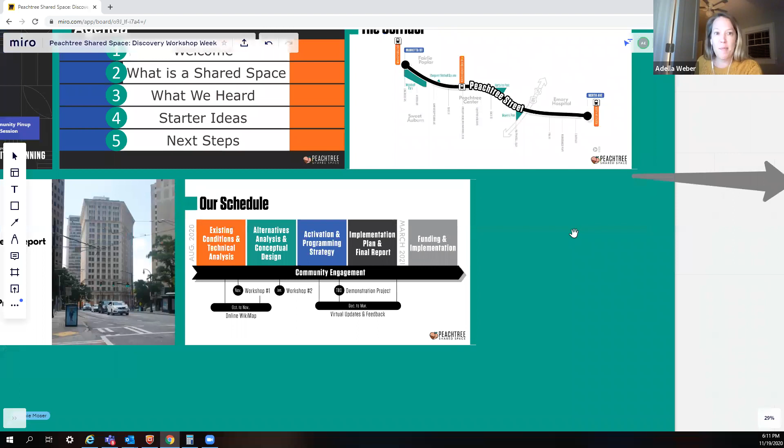In terms of our schedule, we're still at the beginning — at existing conditions and technical analysis. That means looking at where folks are going, how vehicles are moving through the space, where the hot spots are for pedestrians, and what's happening economically and in the market along the corridor. We're going to take everything we heard during this workshop, go back behind the scenes, flesh it out more, and come back to you in January with a refined concept for where this shared space should be. We're still at the beginning of the process, and we hope you stay with us throughout, looking at a beginning-of-spring endpoint for this study.

With that, I'll turn it over to Ian Lockwood to talk a little about shared spaces. For those new to us, hopefully this will be new, and for those joining us again, just a rehash of what we're here for. Ian?

Thanks, Addie. Yes, shared space — by the implication of 'share,' it means it's for everybody. It's a democratic space where everybody is welcome and feels comfortable. It doesn't matter if you have a disability, or if you're an elderly person, a woman, or a man — you will feel comfortable in the space. We're focusing mostly on the needs of residents and business people who work downtown and locals, and we're going to try to make this space as cool as we can, which would attract visitors as well. But it's really focused on all the different types of folks in Atlanta who want to use this space.

If you shift over to the right a little bit, this is a space — it's an older location, but you can see all the people walking and socializing, just regular folks enjoying the space, doing their business. This happens to be on our corridor just over 100 years ago, and you can see the same views in the background.

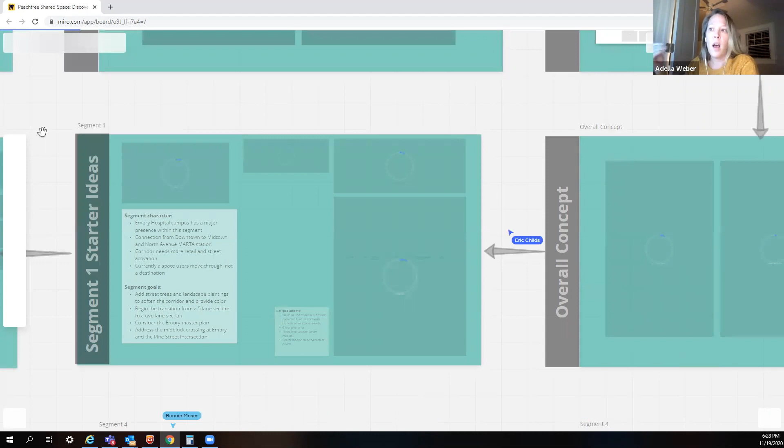We've talked with several folks at Emory Hospital, looking at their master plan, what's the bigger plan for the area, looking at how people are moving through the space and what historic qualities they have of the buildings throughout there. And with that, I'm going to turn it over to my colleague, Eric Childs, who is going to walk us through segment 1.

Thanks, Addie. Let me get the map up and running. I apologize. Thanks, Addie, and thanks everybody.

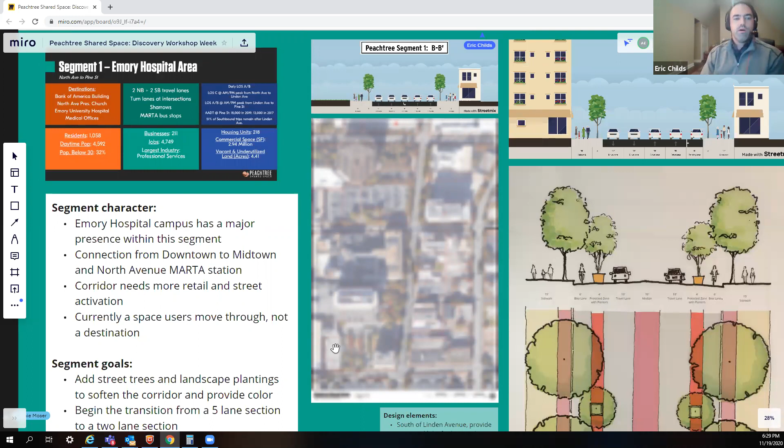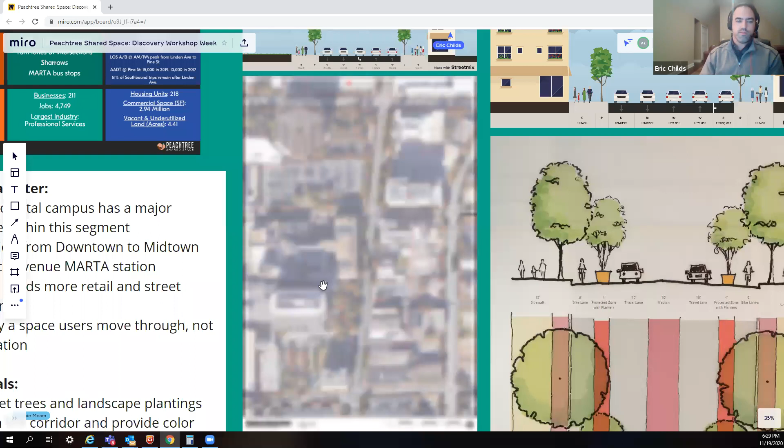So just to describe the character of this segment, which again goes from North to Pine, it's typically 4 or 5 lanes, mostly 5. It narrows to 4 in one small segment above Renaissance Parkway. As Addie mentioned, Linden and Pine provide access to the connector. And the Emory Hospital campus has a major presence here; they own most of the land, particularly on the west side of Peachtree.

Currently, the vast majority of their staff and visitors enter on Peachtree Street. While their master plan does call for that to change, it could be some time before that gets realized. And of course, we have the North Avenue MARTA station at the very north part of our corridor.

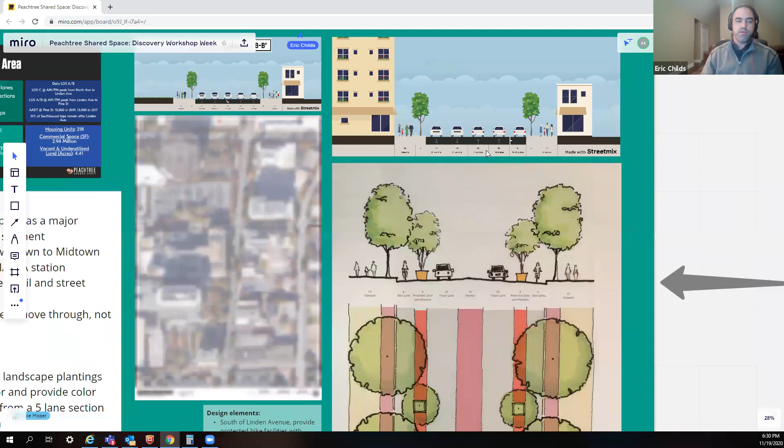So what we heard when we had a virtual open studio was that this area could use some softening through street trees and colorful landscape planting, as Megan was discussing. There was some concern about the number of vacancies, that this feels like more of a place to move through, and there's a desire for more street-facing activity. We certainly heard enthusiasm for bicycle facilities here, as well as a more comfortable and interesting pedestrian experience, and people noted the uptick in biking, particularly during the pandemic.

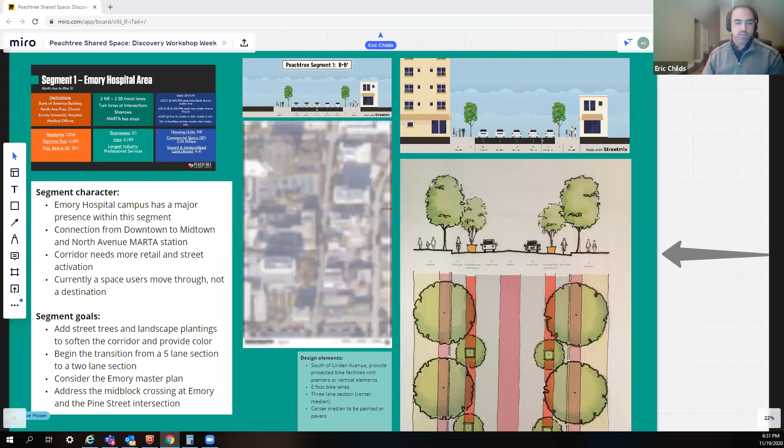So in terms of the goals we're trying to accomplish with this segment, thinking holistically about the entire Peachtree Street corridor, this segment is trying to tee up the transition we want to make from 4 or 5 lanes down to eventually 2 lanes. We certainly want to make sure our work meshes with the Emory Hospital campus master plan, which we've reviewed with them.

And there are 2 focus areas we identified that we'll need to continue looking at: the mid-block crossing at Emory Hospital, and the Pine Street intersection, which would mark the transition between segment 1 and segment 2.

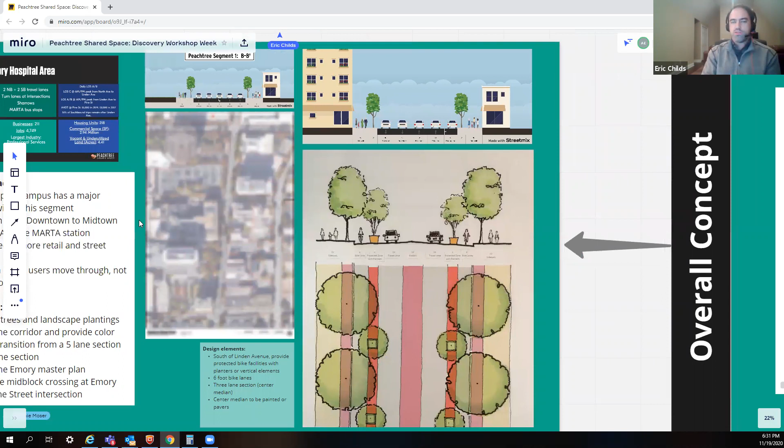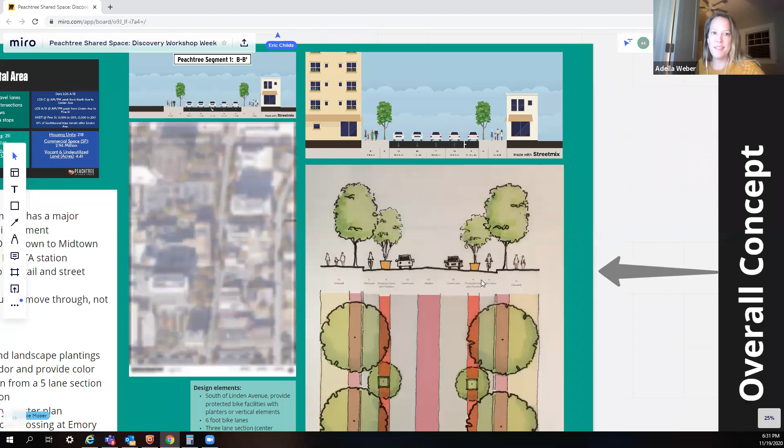So Addie, if you could zoom in on that section and plan vignette there, I can talk through some of the design elements we came up with. Sure, and I apologize because the aerial isn't popping up, but can I pause right here? Will that work for you? Yeah, that's perfect.

The idea here is that south of Linden Avenue, we would want to provide a 3-lane section that's 1 lane northbound and southbound with a center median, along with protected bike lanes that are also northbound and southbound.

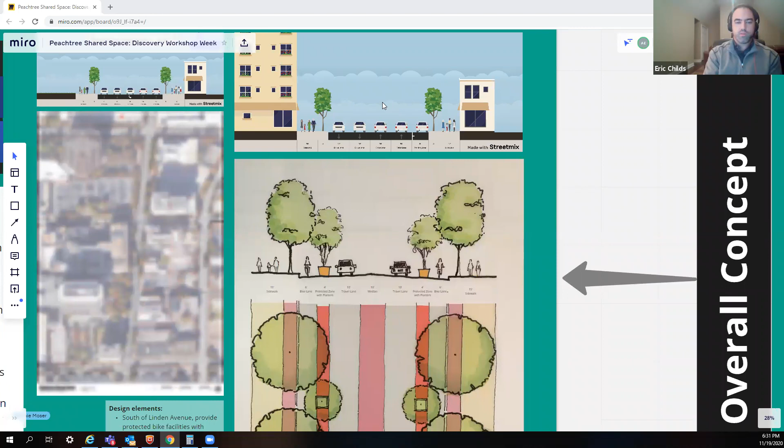Planters or vertical elements would protect cyclists from vehicular traffic, with 6-foot wide bike lanes and protected zones being 4 feet wide. We would want to paint those protected zones to help visually narrow the roadway, and the center median could be painted or use a paver that contrasts with the roadway surface.

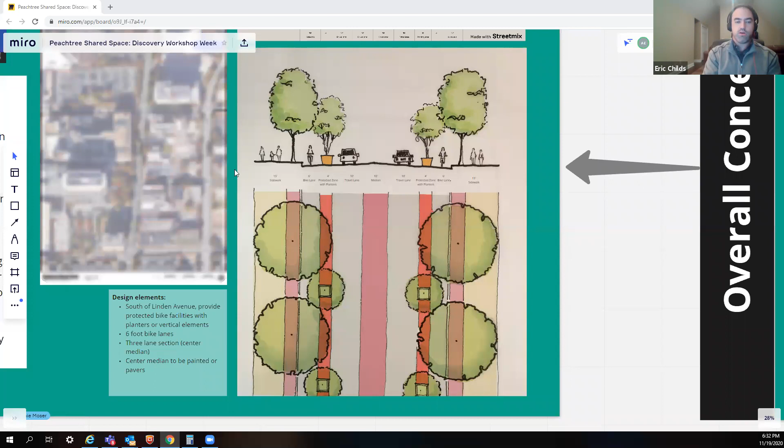The intent here is to rebalance the street for all users. We're trying to respect the need to provide access to the hospital, since the patient entrance is right off of Peachtree, and currently most employees and visitors access it off of Peachtree. We're also trying to respect the fact that Linden Avenue is a major connector, a major thoroughfare to the downtown connector.

When we were looking at the traffic data, something like 49% of the traffic going southbound on Peachtree turns off onto Linden on the way to the connector. So that's why we're trying to start the 3-lane section south of that point, and that helps tee up segment 2, which is what Bonnie will talk about next.

Hi everyone, and welcome to segment 2, from Pine Street to Porter Place. The 4 lanes, 2 in each direction, continue in this segment. And a little bit about the character of this area.

This is considered by most as a connection from midtown to downtown. Currently, folks are seeing it as a space that users move through, but not necessarily a destination. We heard that folks feel safe in this space, but they don't necessarily enjoy moving through it. It doesn't feel quite comfortable.

So we set some goals for the area. First, to instill some vibrancy. Second, to draw interest, so do something with this bridge that entices folks to want to cross it.

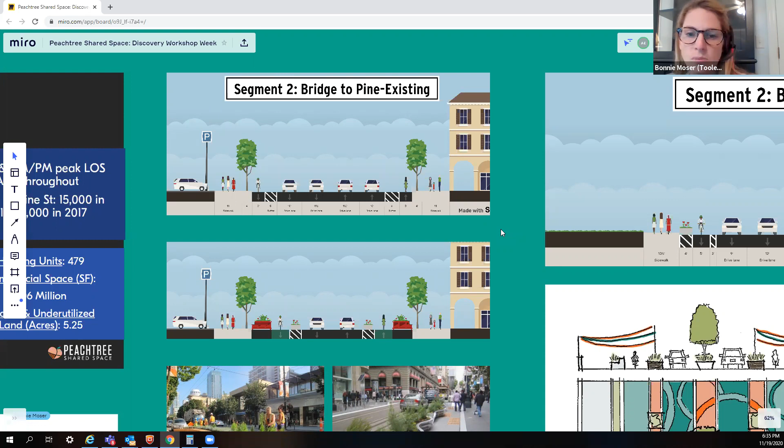So the idea here would be to put in some sort of planter or vertical element that's protecting cyclists, and widening those bike lanes since we have the room, making them 8 feet, so we're able to allow more cyclists and scooters to move through the space. With the additional room, we'd also love to extend the sidewalks.

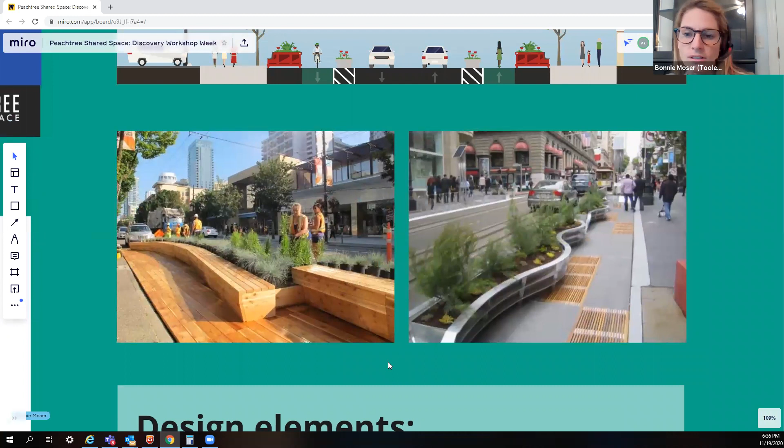Here you can see some images of retrofit sidewalks, so that at sidewalk level you get a little bit more space to move. If there's joggers or walkers, they've got a little bit more space to move through this segment of the corridor.

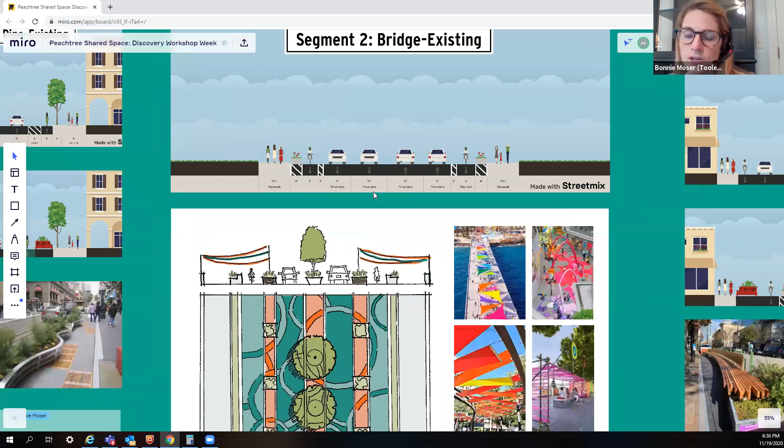Now let's move over to the bridge. Currently there is a jersey barrier with a planter that separates the sidewalk from the roadway, but the cyclists don't have any sort of protection other than a painted buffer.

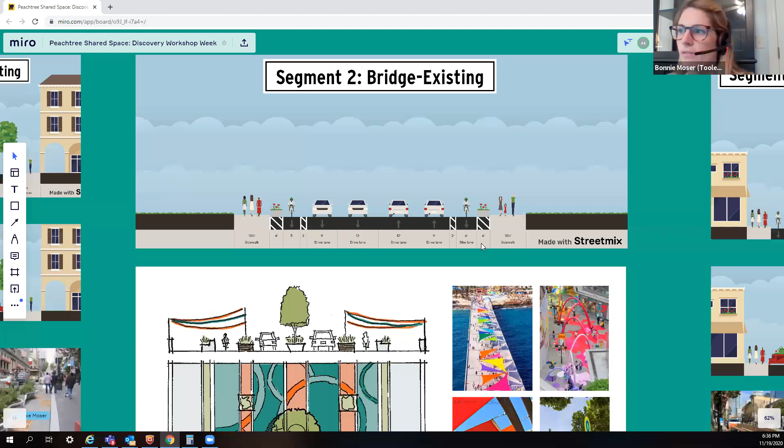Below you can see a plan view and a cross section. The green would be spaces that you move through, so those would be travel lanes and the bike lanes, which would be widened out to 8 feet. And then the orange are buffered areas.

So you've got maybe planters or some sort of vertical art element that's drawing folks' eye from the roadway out to the bridge and makes them feel invited into this space. And then a center median with ideally some sort of planter with a tree to narrow that roadway and make sure that traffic is calmed through the area.

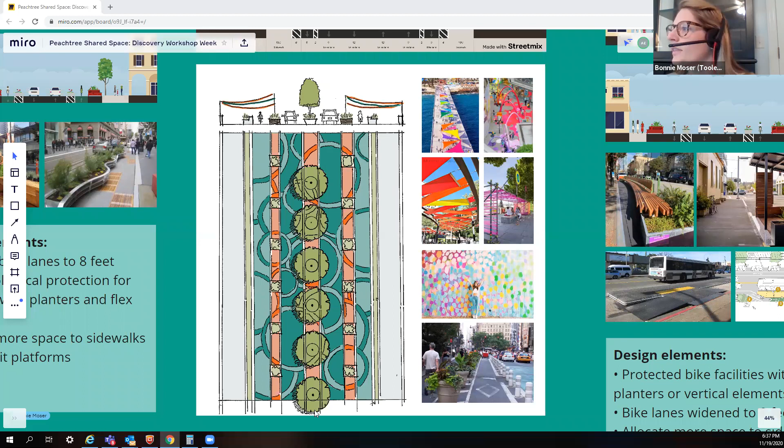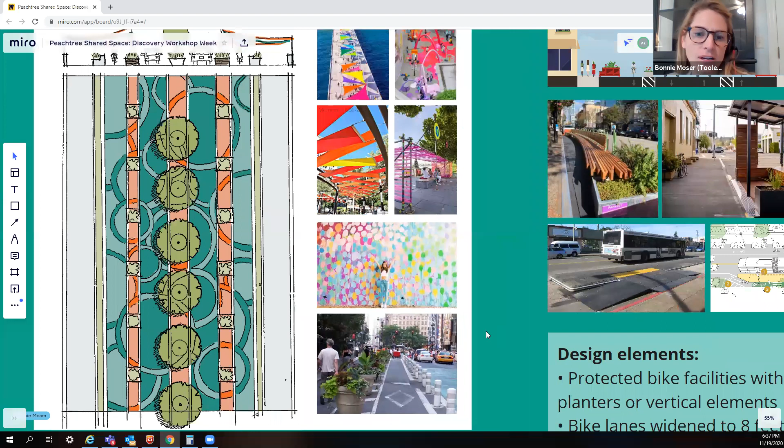If you'll look at the photos to the right, you can see a couple different temporary and permanent art installations. I was really inspired by the Hense mural on the Beltline. This is just an underpass, but I think most Atlantans know this is an iconic space for selfies and engagement photos. We would love for this bridge to invoke some sort of fun and exciting selfie element that draws people to the space and gets more people on the bridge.

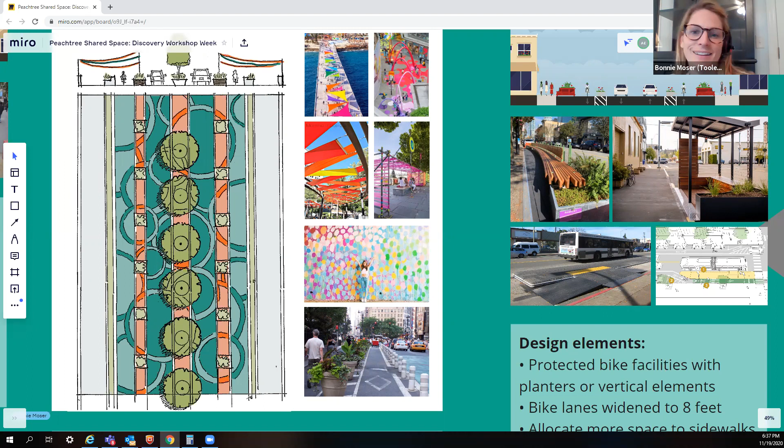Yeah, I think Bonnie's just spot on. We talked a lot internally on this team about where do people go to take that Instagrammable photo, or as CAP made a point of, what is the B-roll when people come here and start filming for the big sports arenas, and why isn't that focus on Peachtree Street? I think that's a really good point. How do these elements really start having breadcrumbs, as the James Lima folks talked about, that lead you down to a really special place and create that magic you want in your main street.

So just south of the bridge to Ralph McGill, you've got 4 lanes of traffic and then a left turn lane. Reallocating that space to 2 travel lanes, you're able to put in a buffer with planters for cyclists to have protection. Also in this area, you have some spaces where the sidewalk is a bit narrow, and you have some street furniture and lighting in the sidewalk that prohibits free movement for pedestrians. So extending the sidewalk through here, but also maybe some retrofit bus or transit shelters for folks.

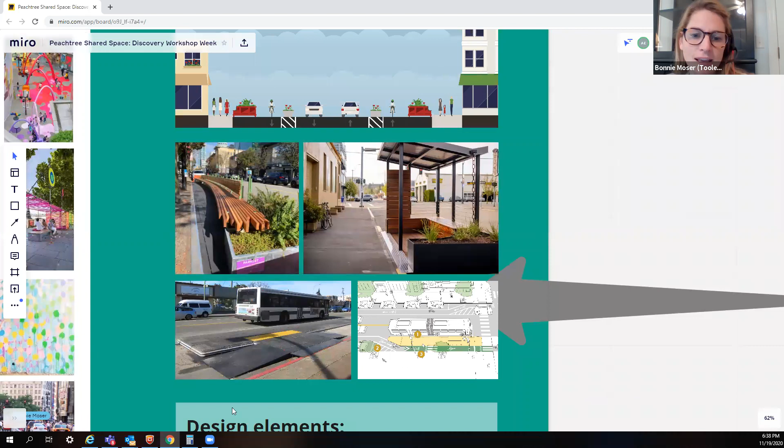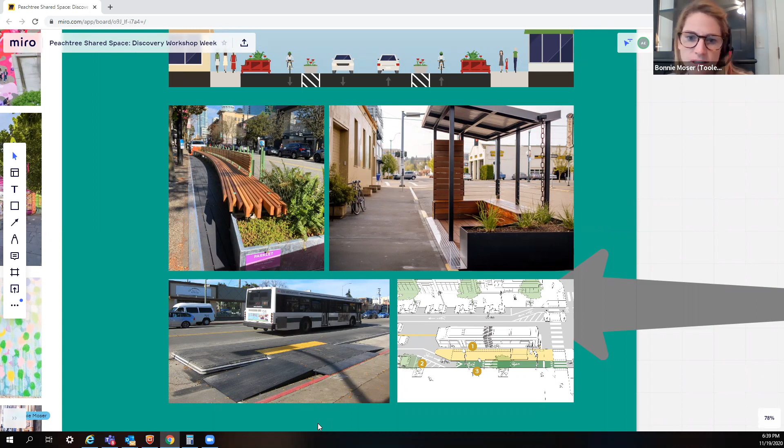And then you can see some images down here. This would be an idea where we could have a floating bus stop, so moving that bike lane in towards the sidewalk and then allowing a space for folks to load at the transit stops down on this end of segment 2.

All right, Bonnie, do you want to jump into segment 3? So this segment 3 is the Peachtree Center from Porter Place to Forsyth Street. This is the piece that the city of Atlanta in their previous work really focused on design-wise. So we wanted to take it back out, take a look at it, get feedback from everybody we've spoken to this week, and really identify, is this the right direction for this space? What's needed, what's missing?

Alrighty. So talking to folks this week and what we saw, we really heard that this segment of our study area is considered the heart of downtown. It's got an established density and it's a great place for folks to work. But we did hear that it's lacking in elements for everyday use - play, art, green spaces, the things you'd normally see on a main street, you don't see here. Folks view this as a space that they move through and not a destination. If they want to be outside, maybe they go to Centennial Park or Woodruff Park, but they don't typically tend to stay here.

You've got some difficult crossings at both Baker and Forsyth, and we'd like to use those as opportunities, maybe as gateways into this space. Lastly, transit's not always easily accessible for folks. Maybe they have an urge to cross mid-block to get to a transit stop or to MARTA, but there's planting or some sort of furniture that's prohibiting them from doing that. And the scale of the architecture in the roadway through this space is not reflective of what you would see in a main street.

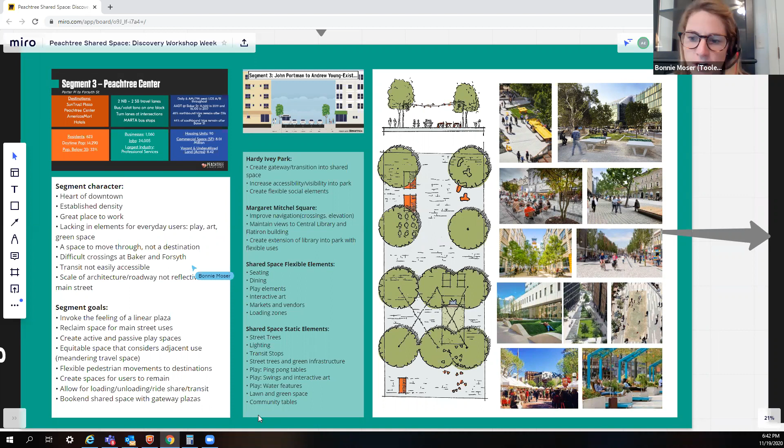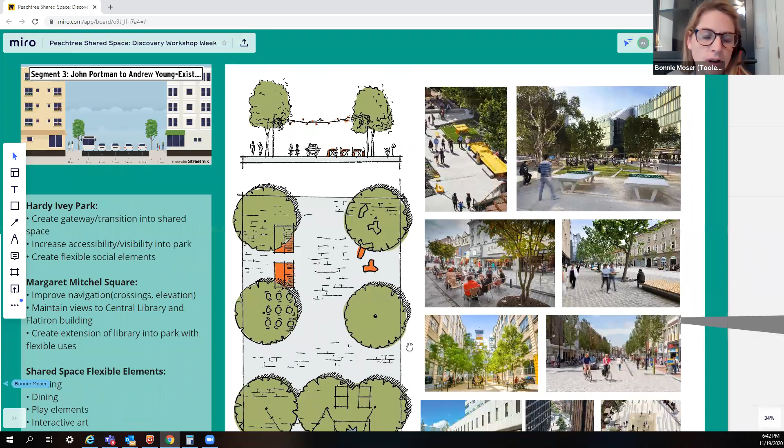Lastly, we know that there is some loading and unloading happening in this area. There are some transit stops as well as ride shares happening, so we want to make sure that we maintain that in the area. So moving on, I'll just touch briefly on Hardy Ivey Park. We don't have concepts to share for you all yet, but we do see this as a gateway and a transition into what could be the shared space.

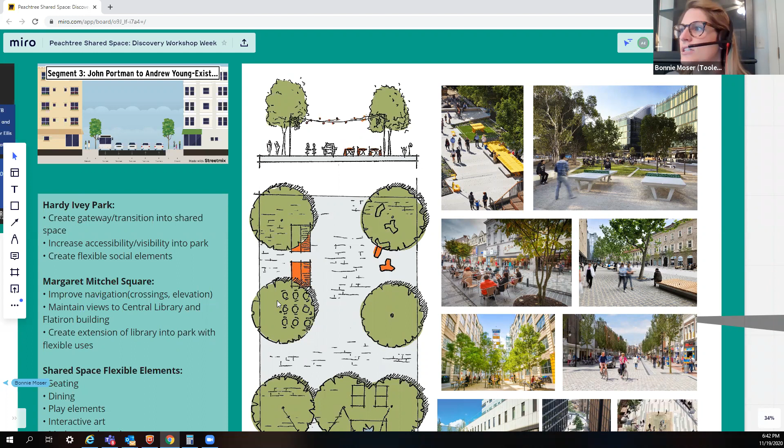We'd like to increase accessibility and visibility into the park, as well as create flexible social elements in this space. Bookending at the other end of Margaret Mitchell Square, we know we've got some crossing improvements and elevation changes to work with in terms of navigation through that area. But you do have some nice views into the Central Library and Flatiron Building, and we'd really love to play off the library there so the uses of the square reflect what's happening in the library, making those feel like one space.

So looking at our shared space, this is just a quick vignette of what could be in the space. It's not necessarily specific to any spot within this segment, but we've looked at the idea of both flexible elements within the space and static elements. Those flexible elements, the ones we really heard that folks want, would be seating and dining.

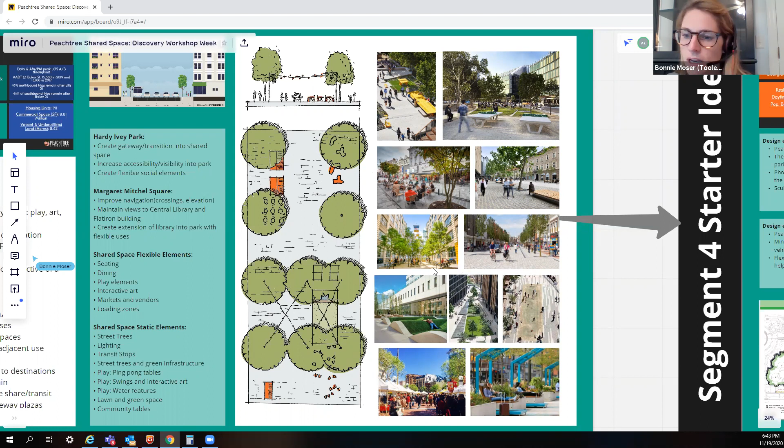Things that you could move around throughout the space depending on what was happening there. Those can move from one side of the street to the other, or one end of the street to the other. Some play elements could go along with that flexible outlook.

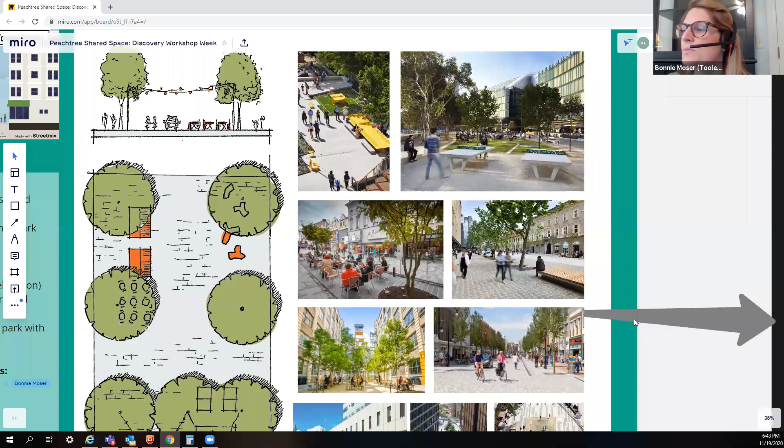As interactive art, we heard a lot about markets and vendors, as you all heard previously. This could be an opportunity. You can see towards this plan view, those two orange buildings to the left, temporary spaces that maybe are open on the weekends, or come in and set up and close down during lunchtime or something. And lastly, loading zones.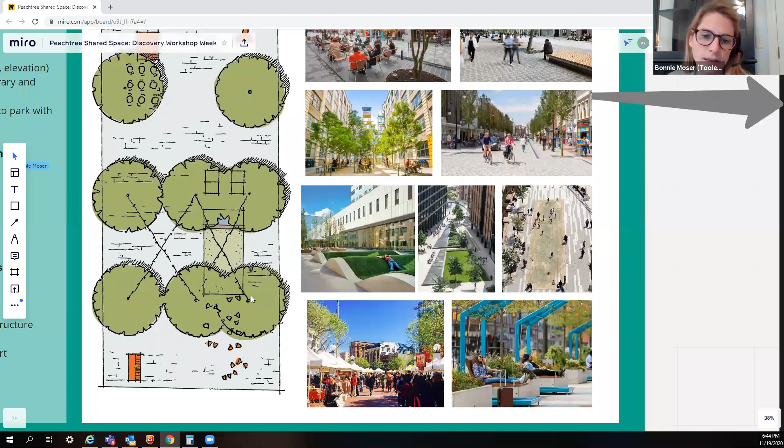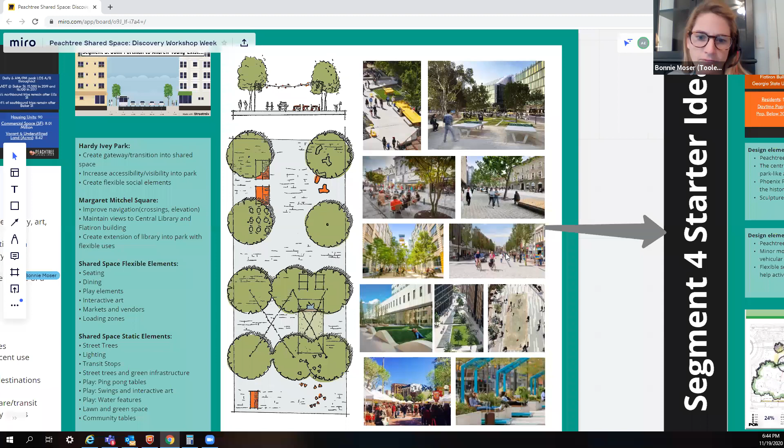So in this sort of shared space, that would be able to take place throughout this segment. And then more of the static elements, you've got your street trees and your lighting. These things would help guide folks moving through the space, maybe where is a good idea to ride my bike or drive my car through, and where should I avoid. Transit stops would be those static elements, and then some play elements.

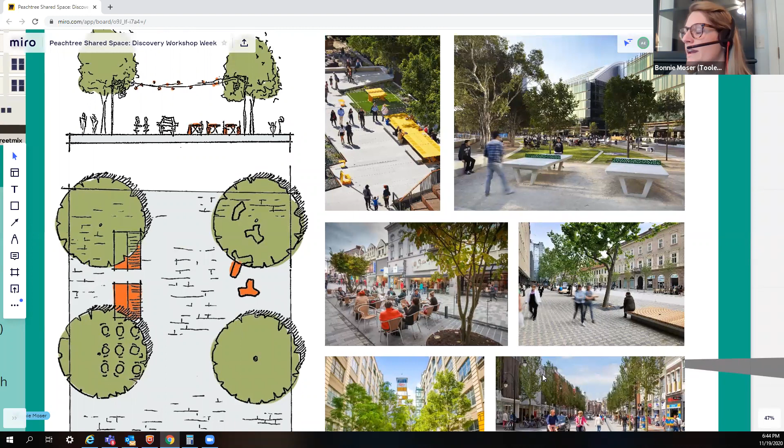We've got a couple images here to the right—maybe there are ping pong tables or swings or the type of art that kids can climb on. We heard a lot about folks wanting some green space and some space to walk their dogs. So there's a few images towards the bottom here of what some linear strips of lawn could look like, and how folks could interact with those, as well as perhaps a water feature.

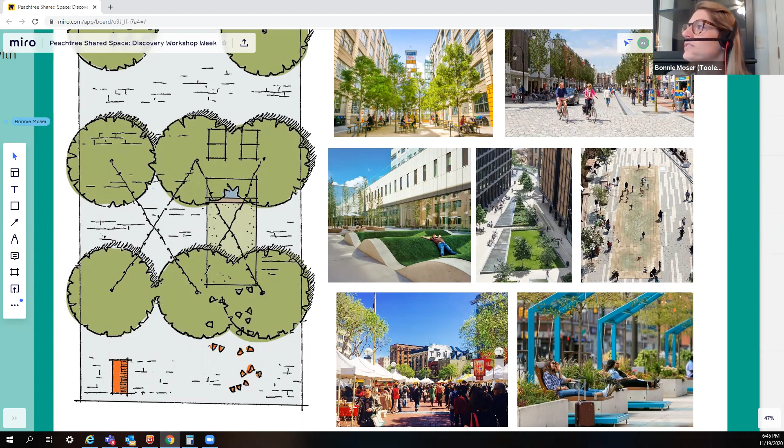You can see towards the right one that folks could walk through or rest their feet in during a lunchtime, something like that. And last, I think it's the top left, you can see an image of these long community tables—maybe this is an area for folks to be able to work outside together or collaborate.

So these are just a few ideas of what could happen in this space.

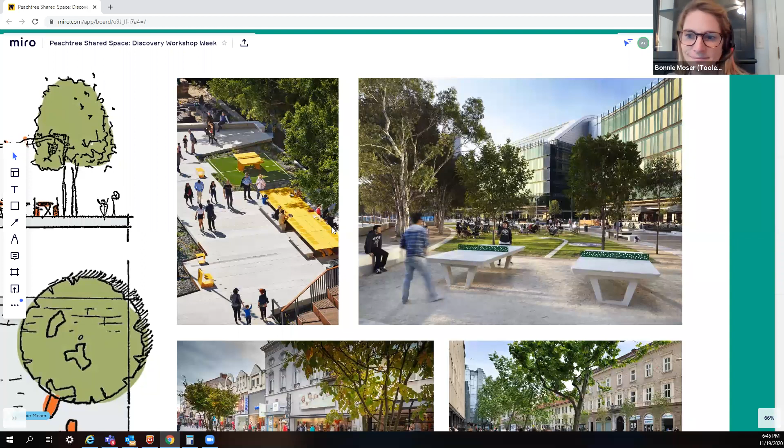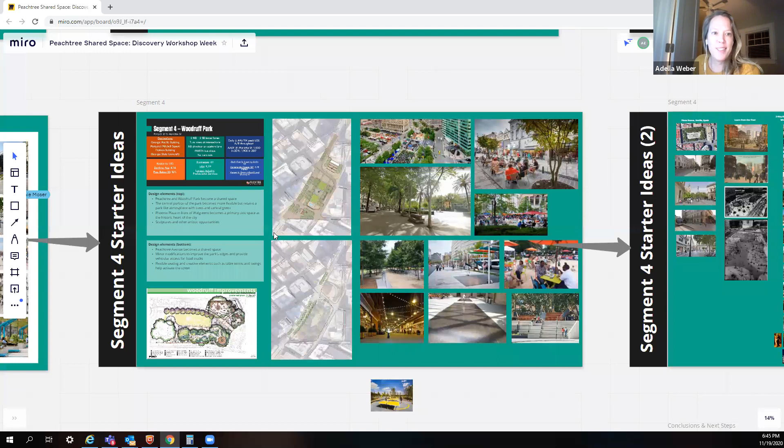Thanks, Bonnie. As we move from segment 3 from Peachtree Center, we're going to dive right into Woodruff Park. To kick us off with that, I'm going to bring it back to Eric Childs. All right, so before we dive into the starter concepts, I want to talk about our approach really quickly.

We're going to show you several variations of two approaches. One approach is a full reconstruction of Woodruff Park and Peachtree as a shared space. The other approach we took is to just look at Peachtree and reconstruct that as a shared space, leaving only minor modifications for Woodruff Park that are in various stages of planning.

One approach that we are not showing, but want to continue to look into, is retrofitting Peachtree with more short-term measures using street paint, site furnishings, planters, etc., as we've shown in segments 1 and 2, to reclaim space for pedestrians and cyclists and narrow the roadway—just to provide a broader range of options. So Addie, if you can zoom into the concept, the first concept showing the full reconstruction, that would be great.

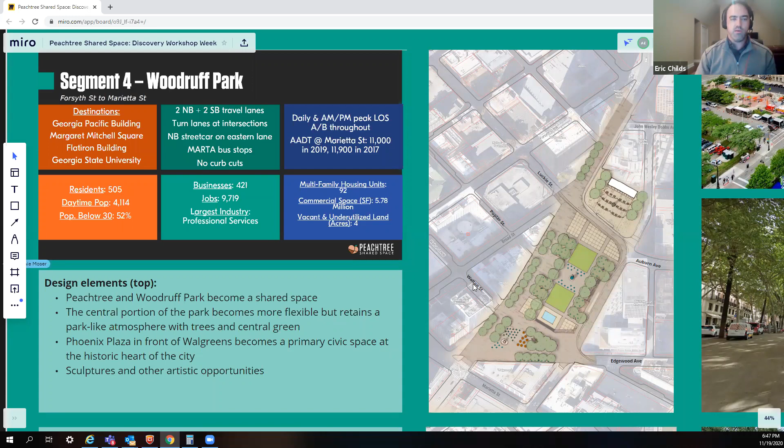So in this concept, Peachtree and Woodruff Park become a shared space. The first move we made was to expand the storefront edge along the west side of Peachtree. The trees would be set back about 25 feet from the building face, providing a generous storefront edge that can be activated with movable seating and street games like table tennis, planters, and artistic elements.

You may have heard of these famous musical swings in Montreal, that when you swing on them, they play notes from classical instruments, and the higher you swing, the higher the note. There's a lot of creativity in Atlanta, and we'd love to bring some local flavor to these locations.

In terms of how we've thought about the space overall, if we start from 5 Points and Edgewood and the Walgreens down there, we've created this triangular space that we've nicknamed Phoenix Plaza, right in front of the Walgreens, and we envision that as kind of the welcome mat and a central civic space that draws you up into the rest of the corridor.

The central portion of the park, which is where you'll see the trees and grassy areas, is a little bit raised. If we zoom in, you'll see that on the southeastern edge we've incorporated a few stairs. We did a high-level study of the existing topography here.

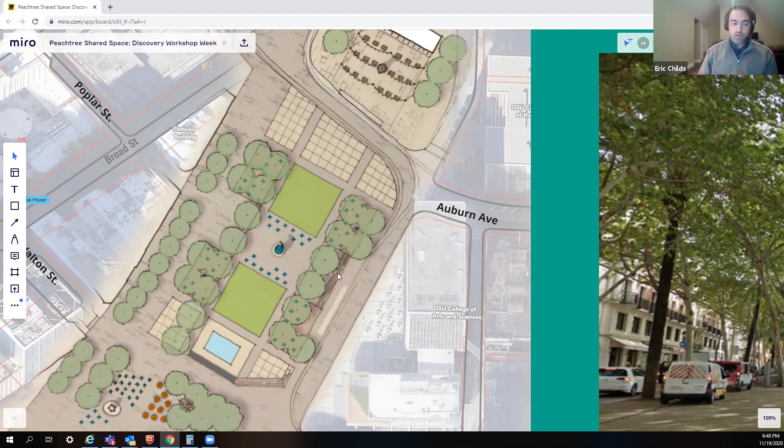We found that currently, if you're standing on Park Place looking toward Peachtree, there's about 6 feet of grade change, and the park slopes up rather severely on that side. So you can't see across the park, which isn't the friendliest, and from a design perspective it's a lot more inviting when you can see into the space, allowing you to feel safer. So we tried to think about this concept by taking that elevation down, sloping it as much as we could while keeping it accessible.

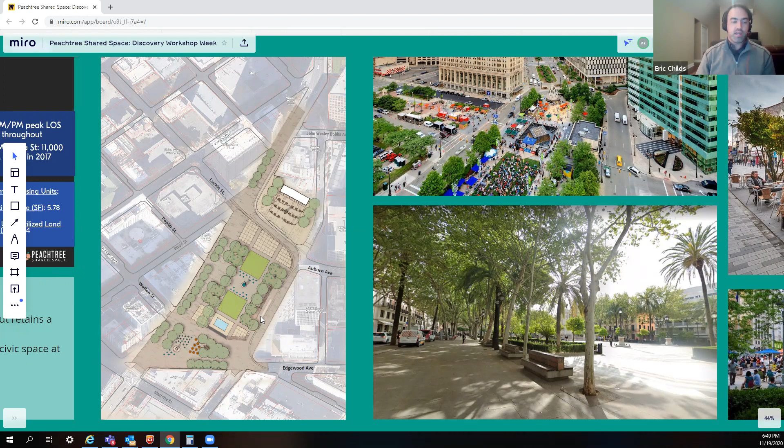That allowed us to cut the number of stairs we'd need in half, and it also allows you to actually see across the park. Again, that contributes to a sense of safety, and makes for a friendlier, more inviting edge.

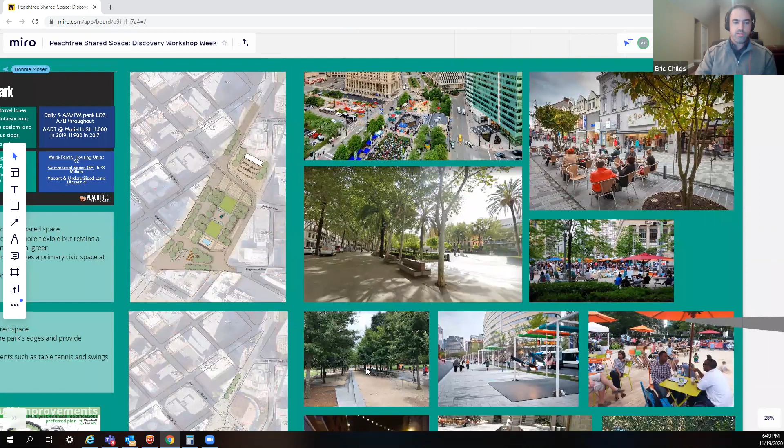As far as how that central space would be used, we wanted to provide a number of rooms that could be used in different ways. We heard from a number of folks who appreciated the verdant quality of the park, and we wanted to retain that while also creating more space for flexible use.

So the center of the park features a vertical sculpture, another artistic opportunity, and plaza space, a paved area that can host events, stages, and food trucks that can pull right off of Peachtree, with the same surface as Peachtree Avenue itself, so there's a sense of continuity when you're in that space.

Grassy squares are just to the north and south of that central plaza, and that's trying to provide recreational space that's there now, as well as a soft surface for things like sunbathing when the weather's nice.

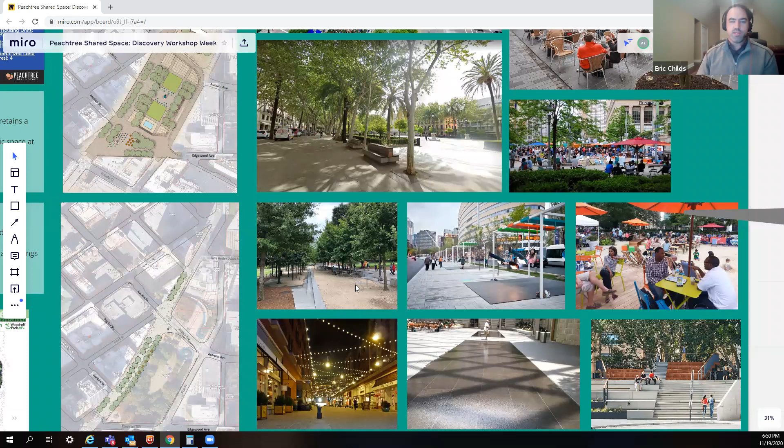Adjacent to the grassy squares on either outer edge, we're envisioning flexible seating beneath the trees, with a permeable surface such as pea gravel or decomposed granite, something a little softer. Addie's got her cursor on an example from the Georgia Tech campus that's pretty nice.

And there, if we zoom back in, there's a blue rectangle toward the bottom of this central area, and that's a water scrim. That's a calming bookend to the green space.

Water scrims are flat fountains that provide a thin sheet of water you can walk across, with a textured surface so it's not slippery. It's different from a splash pad, although if the desire was there we could work that in, but this has more of a calming effect.

And that example Addie's highlighting right now is a famous one from Washington, D.C.

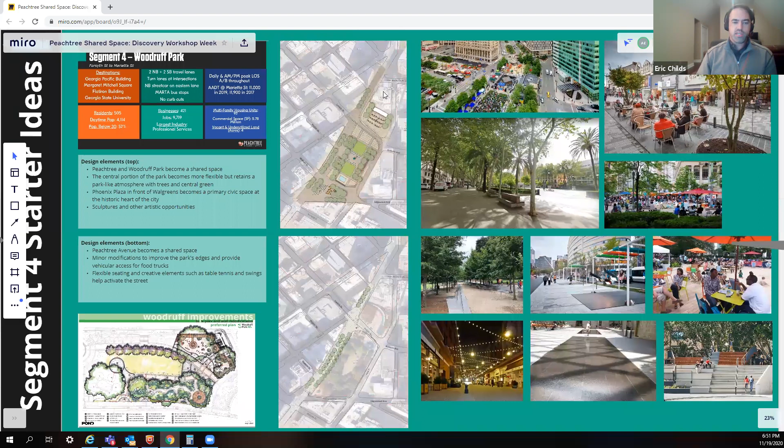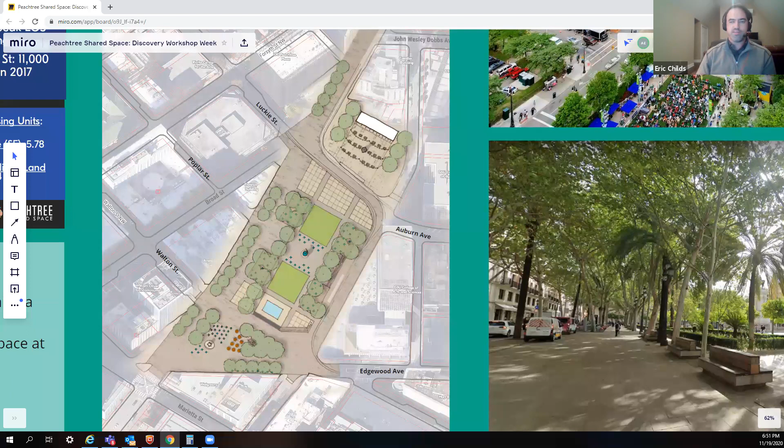If we go back to the concept, the northern end of the park is slated to honor several former mayors of Atlanta, and we found that out as we were sketching this. We're just showing this understanding that if this element is desired as we move through design, we can think about other locations for it.

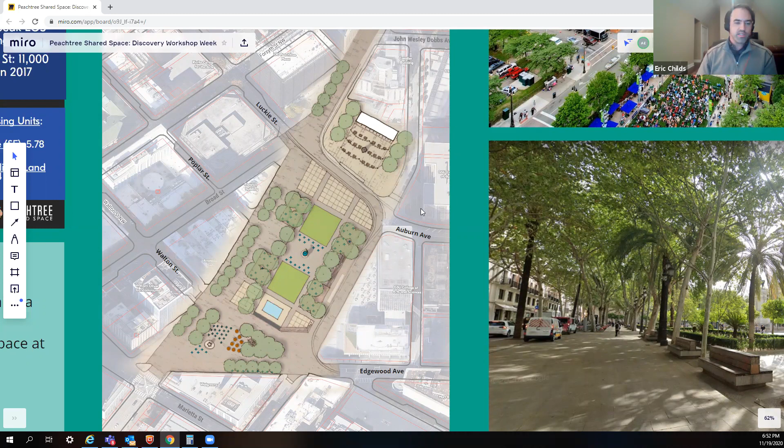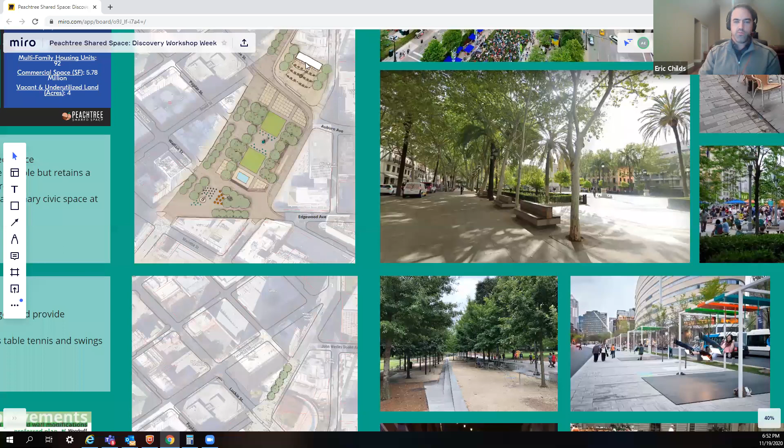Essentially, think of it as an outdoor cafe with picnic tables, or maybe even a beer garden, and street games. We've got overhead string lighting with another vertical artistic element to bookend that northern segment of the space, and a small building that could also house serving areas and whatnot. So if we move on to the bottom concept, this is the Peachtree Avenue shared space.

Again, the concept is the same here for the street, providing that generous storefront edge, movable seating, street games, interactive artistic elements, etc. But the difference is we understand there are minor modifications at various planning stages for Woodruff Park to help improve the edge, as well as provide vehicular access for food trucks.

So this is a less intensive approach that still follows through with a shared street concept. With that, I'm going to pass it to my colleague Ian Lockwood to talk about another variation of the shared street.

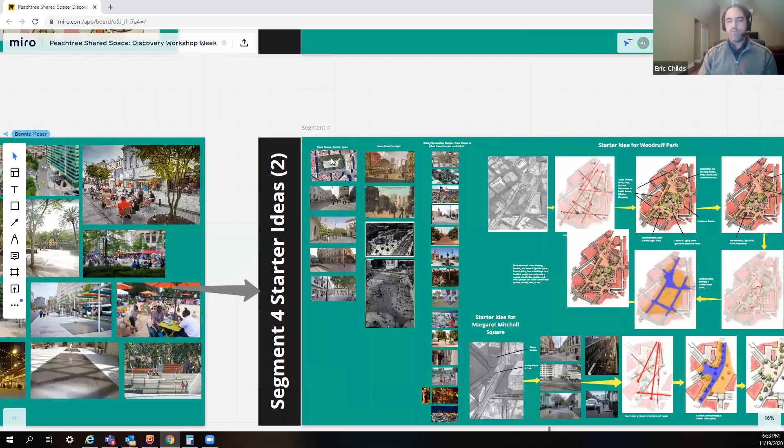Thanks, Eric. There are lots and lots of ways of designing shared spaces, and we'll go to a precedent in Spain. This is a famous square. Addie actually studied here and vacationed here, and Megan lived here for a little while, so we're familiar with this space. We're just going to look at a few parts of it to get an idea of what a shared space could look like.

Here's one of the approaches to the square. You can see the Flatiron building, and how informal the intersection is going down—no curbs, no pavement markings, no stop signs. That's looking the other way into the square. See the little delivery vehicle on the right—when that driver went through, I'm sure they were behaving themselves because the environment requires it.

Here's the tram line coming into the square, and there's the platform. Very simple—it's a ramp up with some warning surfaces on the edges, a handrail, and it's right there in the square, so people get on and off the tram easily.

This is at the far end of the square, and there's an offset intersection there. On the left, the intersection is closer to us; on the right, it's further away. Again, very informal intersections—no stop signs, no pavement markings, no crosswalks. And look at all the parking on the right-hand side there. Just very bike-ped friendly.

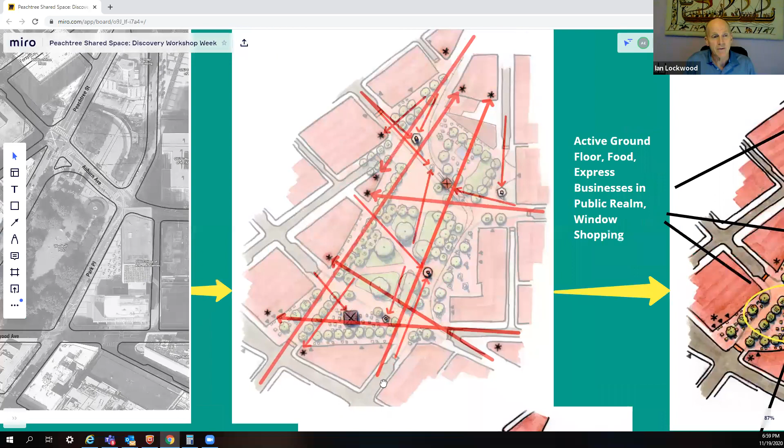Let's take a look up top - that's the existing park. What we have there is some streets with a park in between. This is different than the rest of Peachtree. Why can't we make it a space that's not just a regular street experience, but a whole giant plaza experience? The big lines are the macro views, and the little lines are the micro views.

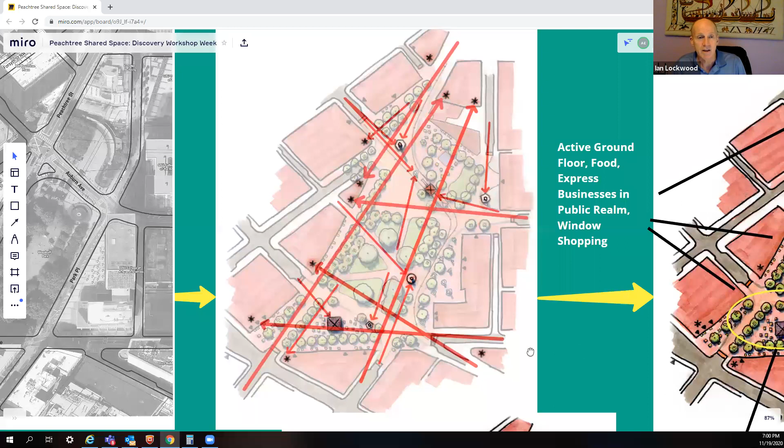It's important to draw people in by giving views of the beautiful architecture and some of the things we actually place in the park. Here are some of the areas we thought about.

Down by the Walgreens, we've taken out Edgewood and reoriented it towards Walton Street, to get a nicer network of streets and to remove the complicated 5-point intersection down at the southwest.

In the middle of the park, it's a quieter area of lawns and some of those legacy trees, the specimen trees, where you can go and relax. The excitement's around the edges, and this is part of the more contemplative part of the park.

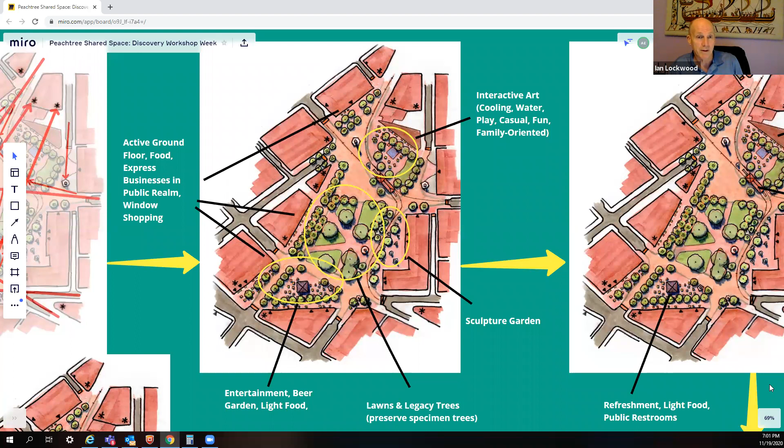Then we have the sculpture garden in front of the art building. At the north end, we have more of a family type area with a splash pad or some sort of interactive art with play areas.

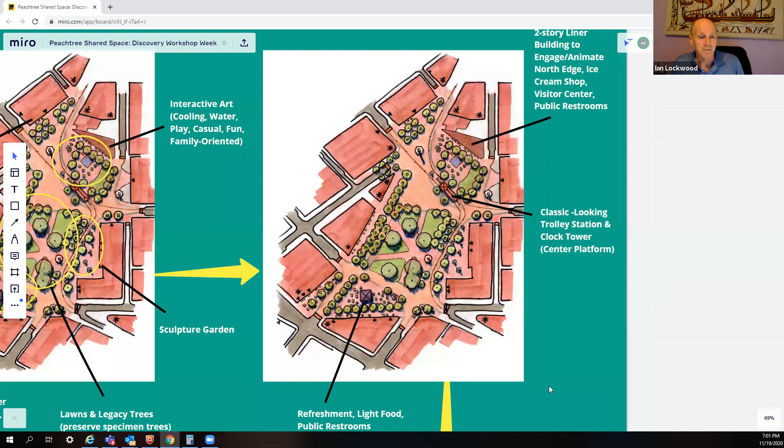At the bottom we have my favorite, the beer garden, where there's refreshments and light food and public restrooms. The building at the north end would probably have a visitor center with restrooms as well. There are lots of places for stages to set up - very flexible spaces, little spaces, big spaces, depending on what you want to do with the venue.

The blue areas are what we call the shared zones. The orange areas are the comfort zones.

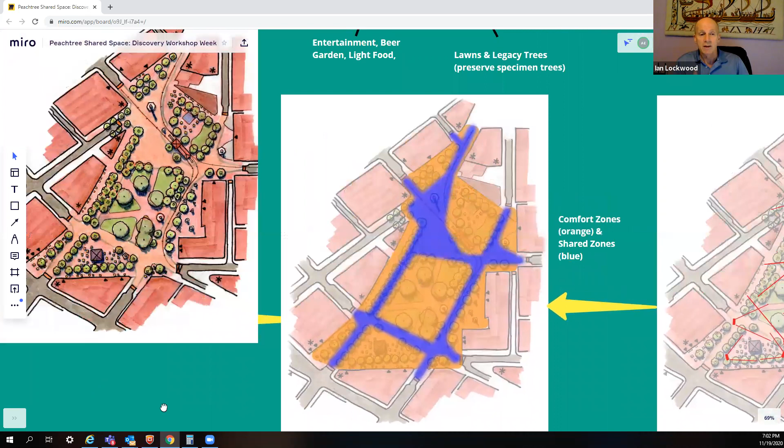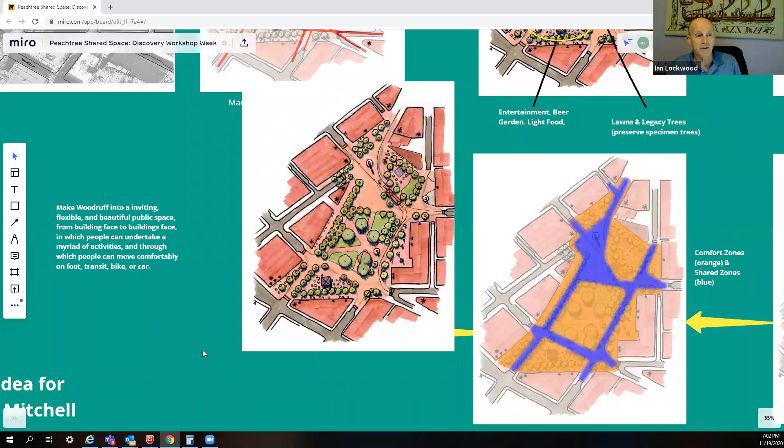So it's got a nice balance. All of the comfort zones on the edges are a little bit bigger, so that we have a lot more outdoor seating and what we call the refuges along the sides. So that's the overall idea: a very flexible, inviting space where you can go by yourself, go with a group, or go to a public event, and feel comfortable whether you go on foot, transit, bike, or by car.

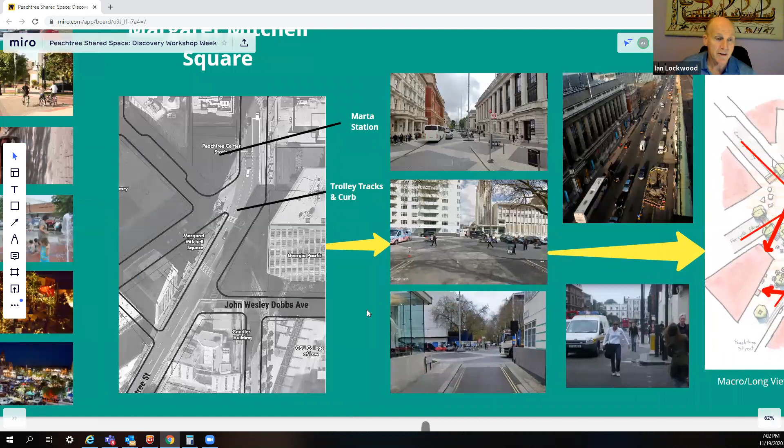And then let's talk about Margaret Mitchell Square, just north of the park. Very peculiar intersection with strange angled approaches. It's got a MARTA station to the north end, and it's got the tracks. The interesting thing about the tracks is they're lower than the sidewalk, and that forms a constraint. So this is going to be like half a flush space—the part on the west will be the flush part.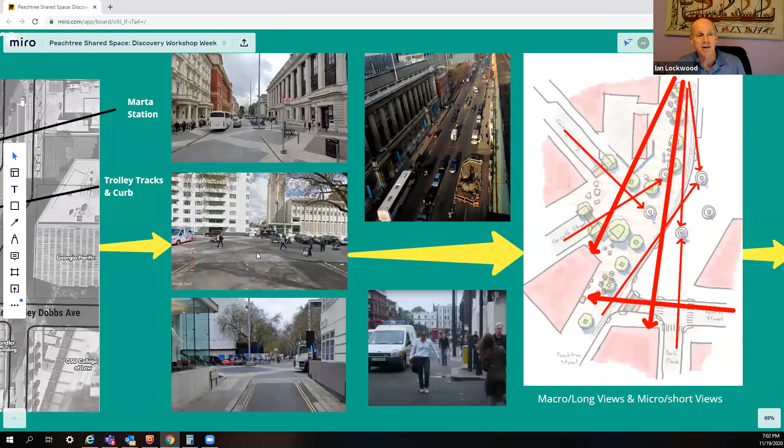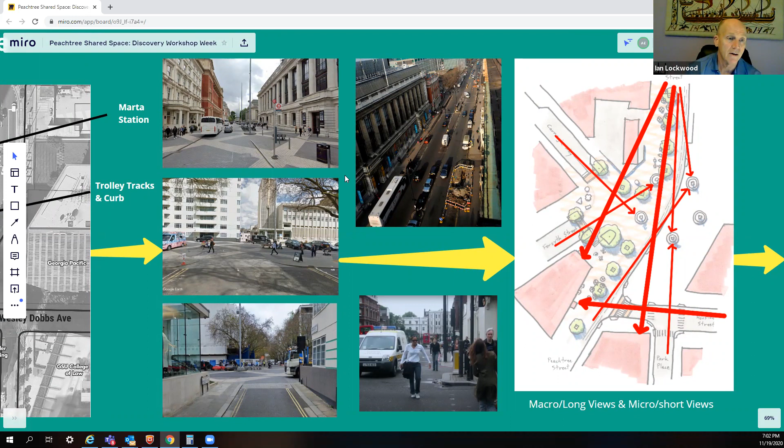We'll use Exhibition Road as our precedent, and you can see it's a beautiful shared space. If you zoom in on the top drawing, or the top image, on the bottom right you can see the bus stop. So though the whole place is generally flush, it's not flush at the bus stop, so that people get on and off the bus more easily.

That dark line on the left is a drain. This is how you get in from the side streets—it's just a simple ramp. There's no signals, no stop signs, you just come in. Now I just want to point out this is the other street from the other side—again, just a nice simple ramp.

That Exhibition Road wasn't always this nice. If you just go to the right, you can see how hostile it was for pedestrians. The sidewalks are too small, you'd have to walk in the street. There's a lot of museums and so forth, so there's a real deterrent from wanting to go.

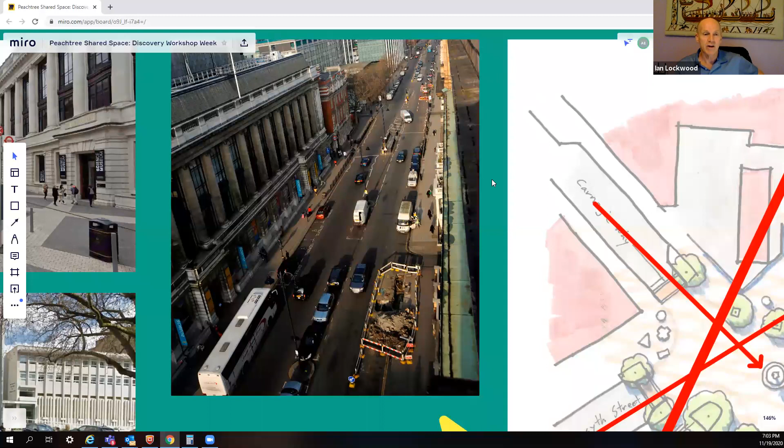And if you look up above: excessive speeds, car-oriented, noisy, difficult to cross. It wasn't a great place. So they changed the environment, and by changing the environment you change behaviors, and you can get the sorts of courteousness and politeness that you want in your public realm.

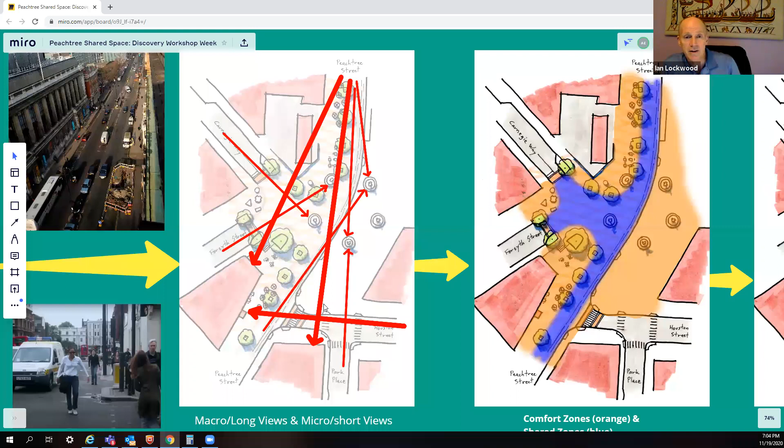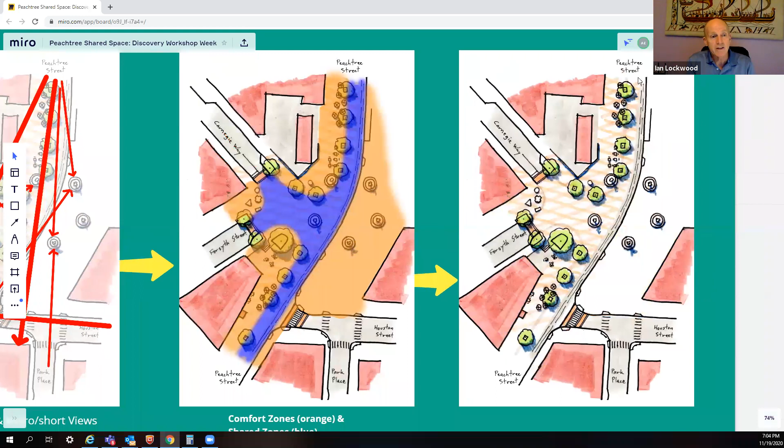So again, at this area we looked at the macro views and the micro views as well, and celebrated those. You can see in blue that those are the shared zone, and the orange is the comfort zones. What we've done is we've pulled Peachtree Street, because it's only 2 lanes, to the east, creating more distance between Forsyth and Peachtree, which allows us to change the geometry somewhat, such that Peachtree becomes the primary route.

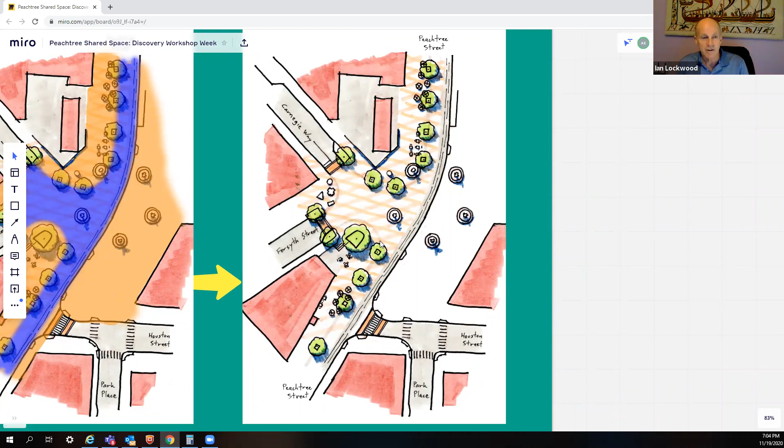Now, if you could just highlight those 5 sculptures—I thought it'd be really cool to have a series of art pieces that kind of include the edge and also include the street. These could be themed after the symbols of Atlanta, or some famous people, or whatever you would like. So those are some starter ideas using some basic principles for some of the key bigger spaces in the south end of the corridor.

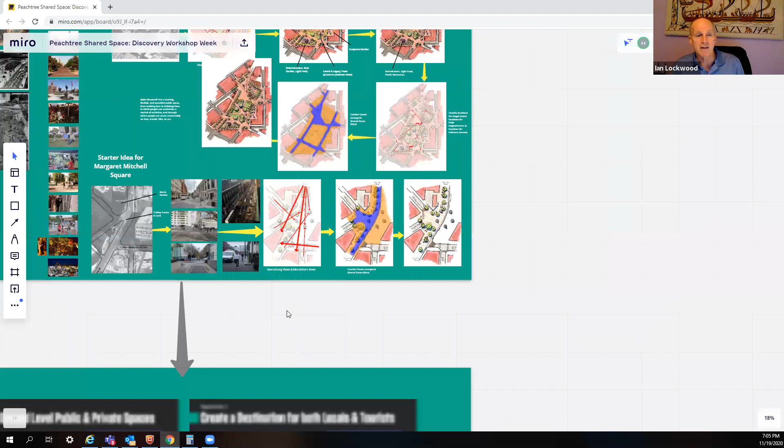Thanks, Ian. I'm going to spend the next 5 or so minutes going over some activation strategies that we have. Andrew Jones is on our team from James Lima Planning and Development, to talk about some of his initial thoughts on activation strategies for this corridor.

Thanks, Addie. So as I mentioned, I'm Andrew with James Lima Planning Development. We're kind of the programming and strategic advisors on this project. We typically help maximize the social and economic value of projects of this sort through innovative strategies.

So the first idea that we've come up with is to activate ground level public and private spaces. In conducting our analysis, we noticed that while Peachtree Street has a sizable number of businesses, very few of those businesses operate at the street level and contribute to street life. There's obviously some logistical barriers that make it challenging for these businesses to move into street spaces on their own.

We've heard from some stakeholders that the kiosk program has some challenges that prevent businesses from spending very long time in those kiosks. One strategy that's been deployed elsewhere for overcoming that is providing capacity building grants and other incentives that help small businesses fill vacant retail spaces through pop-ups or other creative activations, build out street dining or streetery setups, or even construct their own pop-up kiosks that allow them to capture a customer base through foot traffic.